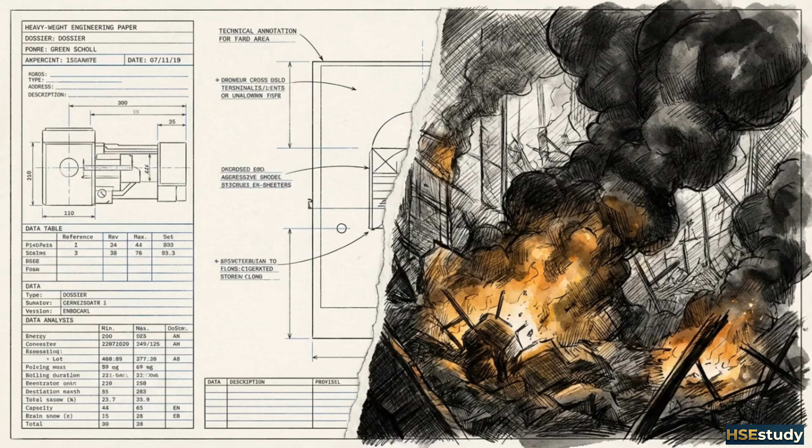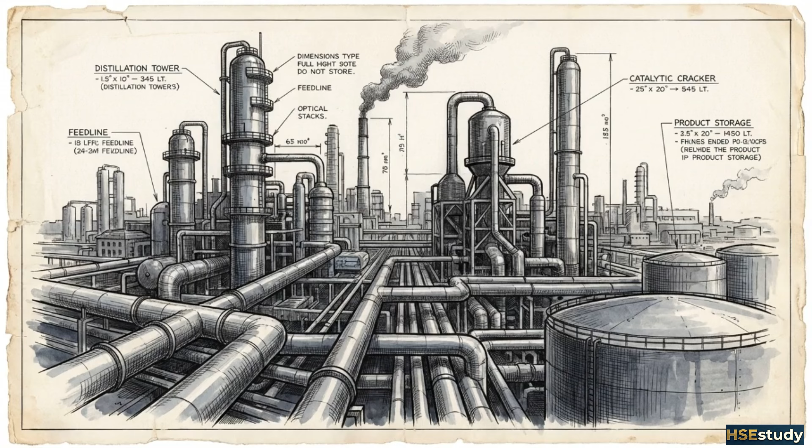The facility was heavily regulated. It operated under the strict requirements of the OSHA Process Safety Management Standard, a federal framework designed specifically to prevent these types of catastrophic events. Routine inspections were logged, and the required safety paperwork was filed with regulators. Yet the plant still detonated with enough explosive force to trigger a mandatory 4-mile evacuation zone for the surrounding community. Safety binders and compliance audits cannot override the physics of highly reactive chemicals when a facility's administrative controls fail on the plant floor.

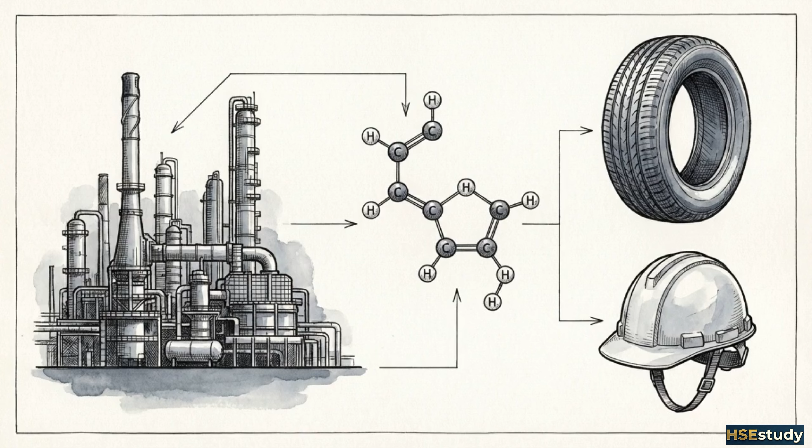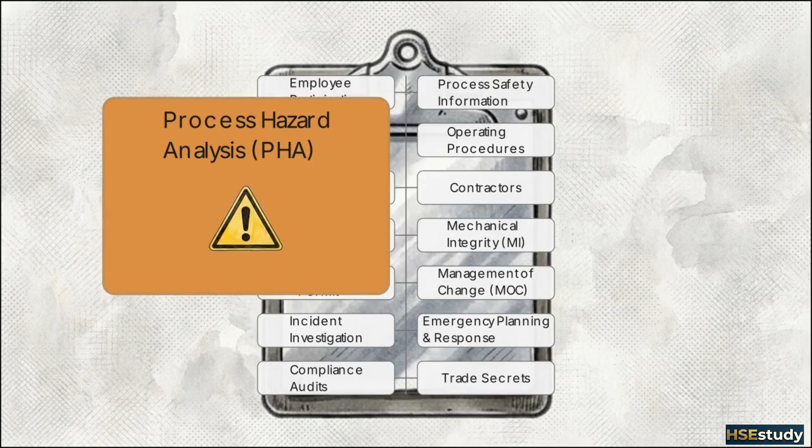Before the incident, the Port Neches site was primarily dedicated to processing 1,3-butadiene. Butadiene is a highly flammable, highly reactive organic compound. The chemical industry extracts and refines it at high purities to serve as a key precursor in the manufacturing of synthetic rubber and plastics. Because of its reactive profile, butadiene is classified as a highly hazardous chemical. Facilities handling it in large quantities are required to comply with OSHA Regulation 29 CFR 1910.119, known as the Process Safety Management Standard. The PSM standard mandates a system of 14 interrelated elements. These include strict requirements for process hazard analysis, where operators proactively identify risks, and mechanical integrity.

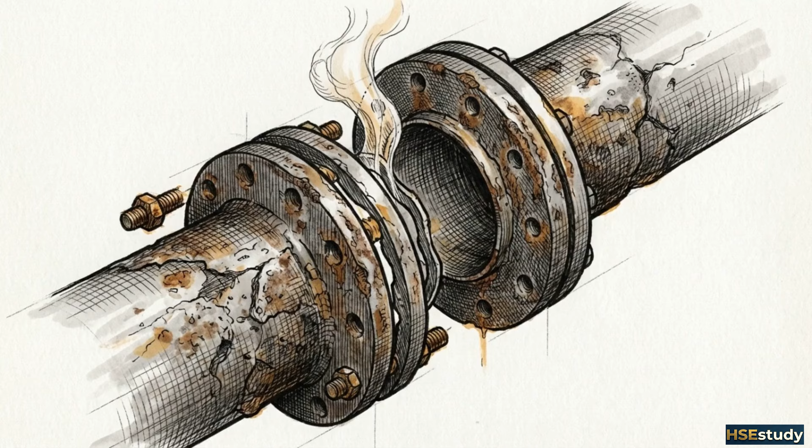The core assumption across the chemical sector is that with a functioning PSM program, the hazardous chemicals within pipes are safely contained. To understand how this assumption failed at TPC, we will conduct a forensic audit of their PSM architecture. The collapse at TPC resulted from a fatal disconnect between the PSM paperwork and the physical reality of the plant's piping network. We can map the specific regulatory failures at Port Neches directly against the physical layout of the facility.

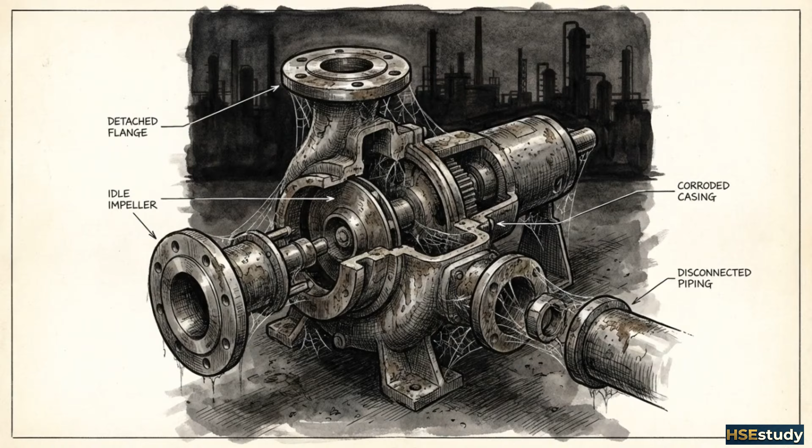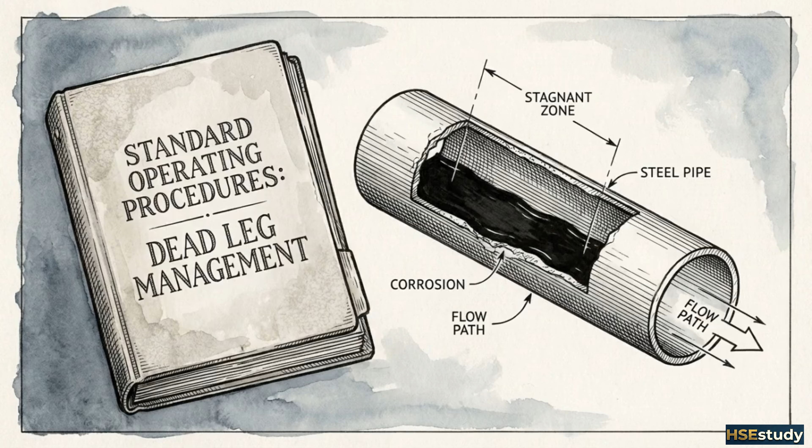A pervasive operational bias exists in chemical manufacturing, the assumption that taking a process pump offline for maintenance temporarily removes it from the immediate risk equation. TPC maintained a written procedure for managing dead legs, sections of piping where fluid becomes stagnant. However, their procedure contained a fatal omission. It failed to account for temporary dead legs created when primary equipment was taken out of service.

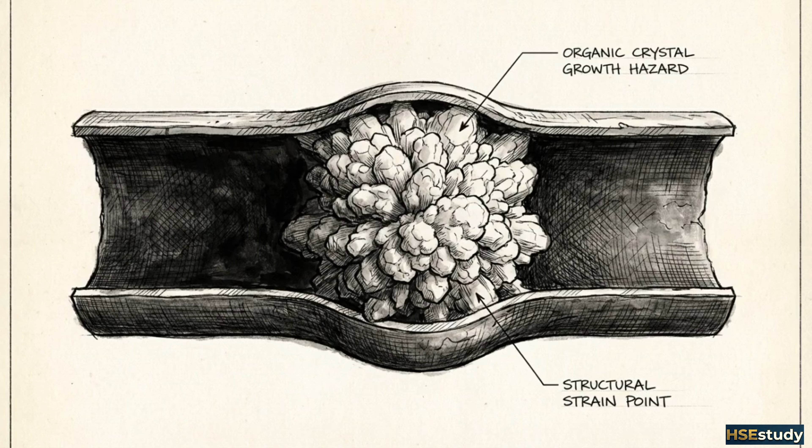Exactly 114 days before the explosion, plant operators took a primary process pump offline. This action created a dormant, blocked-in pipe section, initiating a microscopic chemical reaction inside. Facility management treated this offline pump as a production delay to be managed. They failed to recognize the escalating safety threat actively growing inside the dormant piping. An offline, stagnant pipe containing high-purity butadiene poses a severe hazard. Without continuous flow, the chemical is highly susceptible to auto-polymerization, transforming from a liquid into a rapidly expanding solid.

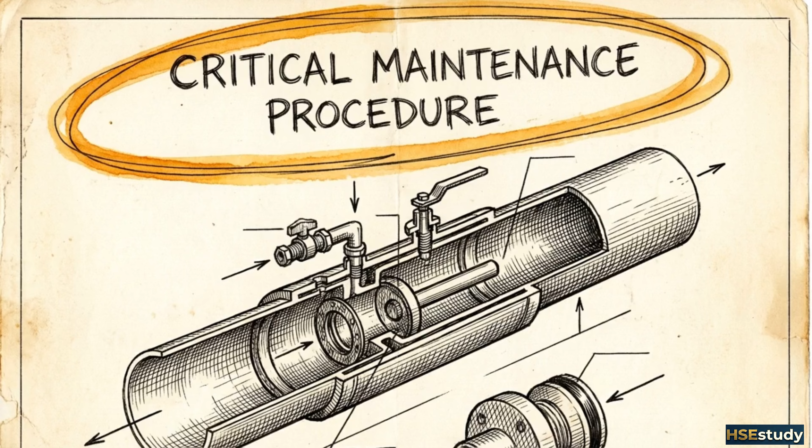The second critical failure centers on the facility's 2016 Process Hazard Analysis Review. 3 years prior to the explosion, the PHA team specifically identified the hazard of solid polymer accumulation. Their report mandated a clear action item: all out-of-service lines must be flushed on a monthly basis. TPC management formally accepted the safety recommendation. They assigned a completion date of December 2016. Over the next 3 years, the facility failed to implement this mandatory flushing protocol. Ignoring a formal hazard analysis recommendation is a direct violation of OSHA Standard 1910.119 paragraph E. It also represented the facility's final opportunity to intervene and prevent the 2019 disaster.

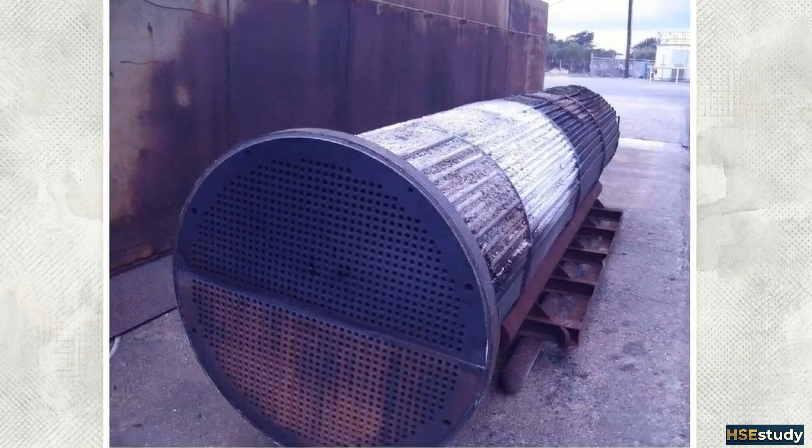The third failure involves ignored leading indicators. By July 2019, the South Unit was experiencing massive, visible polymer fouling that severely disrupted plant operations. This technical image shows the dense, white, cauliflower-like material known as popcorn polymer completely plugging the tubes of a heat exchanger bundle extracted from the process line in September 2019, just weeks before the explosion.

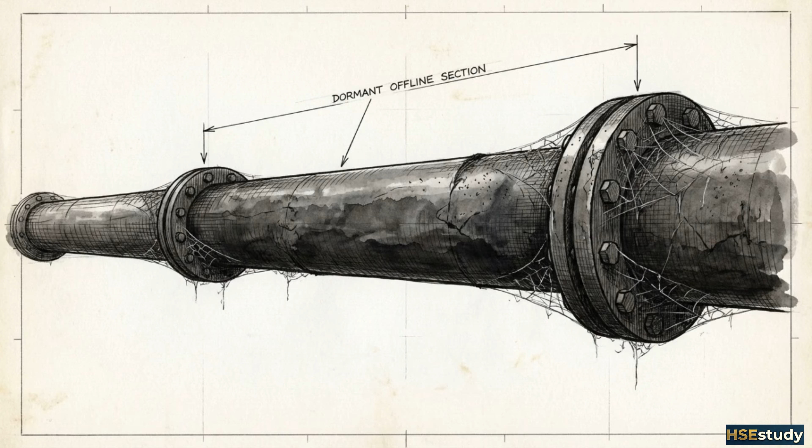Despite this physical proof of dangerous polymer growth, the over 114-day clock continued to tick. The dead leg created by the offline pump remained entirely unflushed. Deviance from safety protocols had become normalized. Management treated critical hazard analysis recommendations as optional suggestions, allowing a known chemical threat to grow unchecked inside their piping.

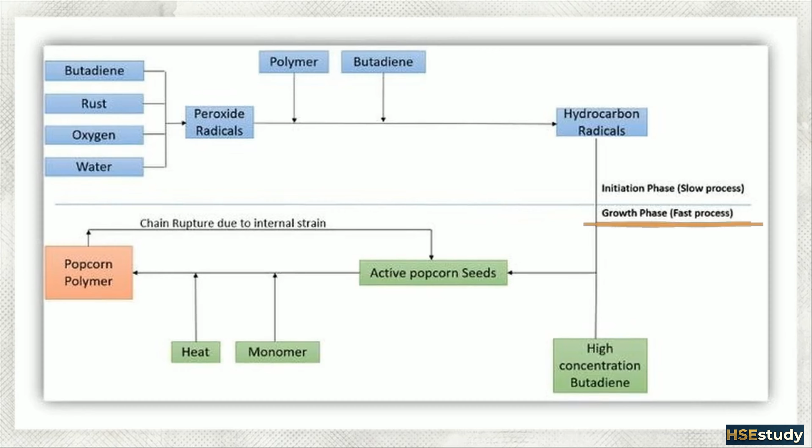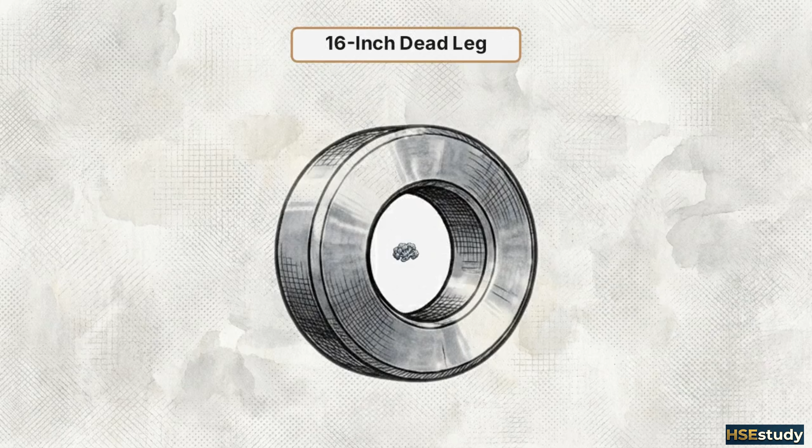This flowchart illustrates the reaction mechanism for 1,3-butadiene. Popcorn polymerization is not a slow scaling process like rust. As shown in the growth phase section, it is an exponential, space-consuming chain reaction where active polymer seeds continuously consume monomer to expand. Inside the 16-inch diameter dead leg at TPC, the solid polymer expanded exponentially. The material pressed against the steel walls until the internal strain exceeded the structural yield point of the pipe. At exactly 12:54 a.m., the physical limits of the steel were breached and the dead leg violently ruptured.

Within 60 seconds, 6,000 gallons of highly pressurized liquid butadiene escaped from the ruptured pipe. As it hit the atmosphere, it instantly vaporized into a heavy cloud that expanded outward along the ground. 2 minutes after the release, the massive vapor cloud found an ignition source, initiating a catastrophic fire across the facility. The rupture was the predictable physical result of 1,3-butadiene reacting in an unflushed dead leg.

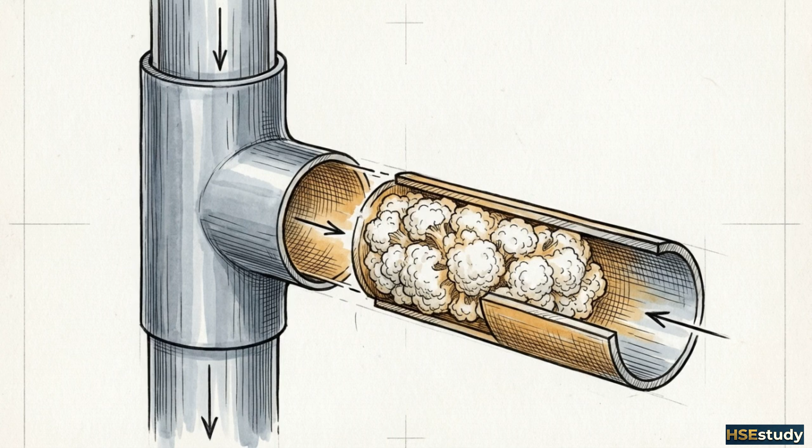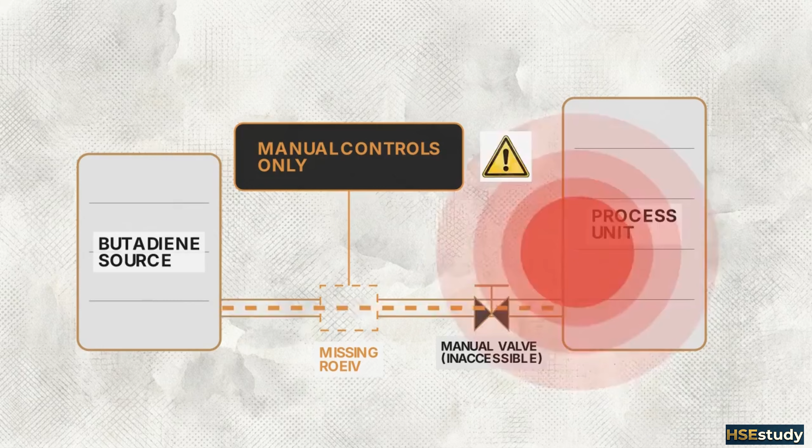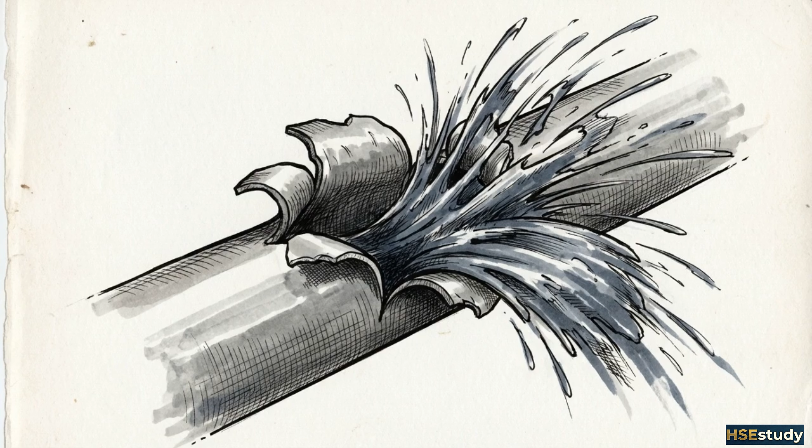The severity of the incident compounded due to the failure of mitigation engineering. Specifically, the plant lacked remotely operated emergency isolation valves on the butadiene process unit. While manual isolation valves existed, they were positioned deep inside the immediate blast and fire zone. Sending operators in to manually close them would have been a suicide mission. Without remote isolation capabilities, the ruptured pipe could not be sealed. The continuous flow of hazardous fluid fed the fire for hours, directly precipitating the secondary explosion at 4:07 a.m. These cascading systemic failures exacted a severe physical toll on the surrounding residential community, destroying homes and triggering mass evacuations.

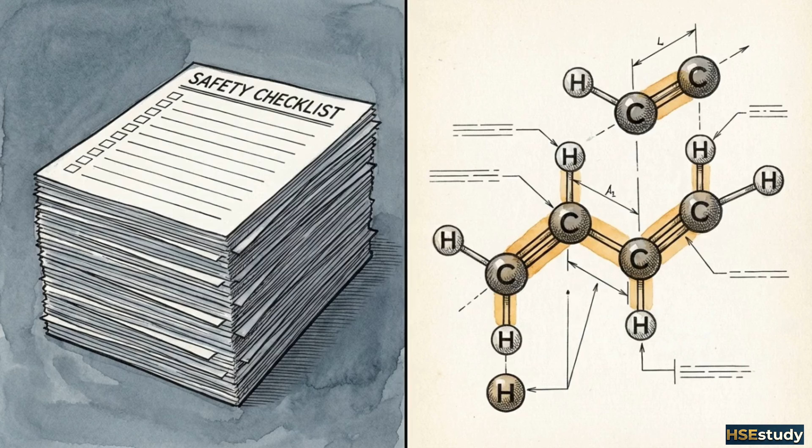For environmental health and process safety directors, the Port Neches incident provides a severe lesson. A process hazard analysis is merely a meaningless paper exercise if its specific action items are not strictly enforced on the facility floor. When administrative deviance becomes normalized, the physics of the hazardous chemicals involved will eventually execute a violent final audit of the facility's safety program.